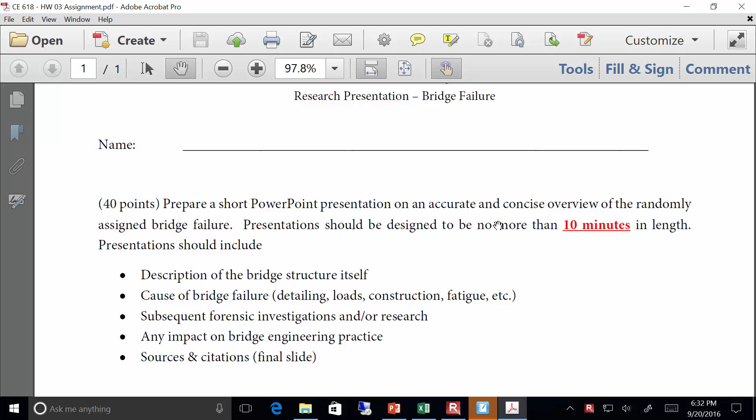If you go back to the schedule, the week before Thanksgiving break I'm not actually going to be lecturing, you all are. Let me zoom into this and pass out hard copies. Now these are for the bridge engineering folks in the room, not the senior design folks. They just get to be spectators for this, because they have plenty of presentations of their own this semester, believe me. All right, so here's how this is going to work.

I wanted to give you all the chance to do a little research on your own and do a presentation on a bridge topic. So what I've decided is I want each of you to present on a particular bridge that failed or collapsed. Tell us why, tell us where it is, what happened, what was the impact on the industry, and so on.

So you're going to prepare a short PowerPoint presentation. I've got 12 bridge engineering students here, so it'll be about 10 minutes apiece, and then I might ask a question or two, and we'll move on to the next one. We'll just keep going, and that'll be the week before Thanksgiving break.

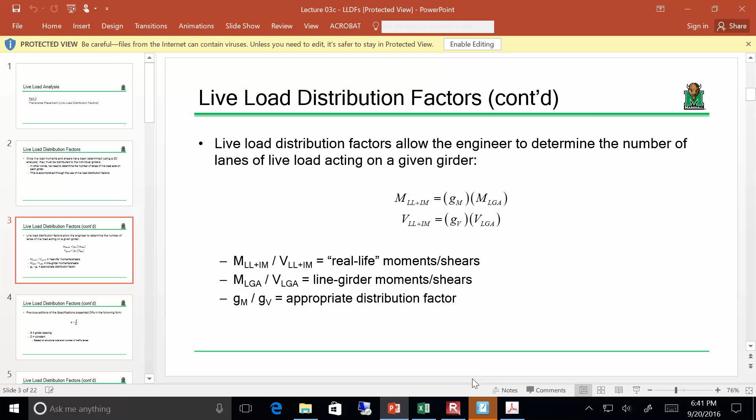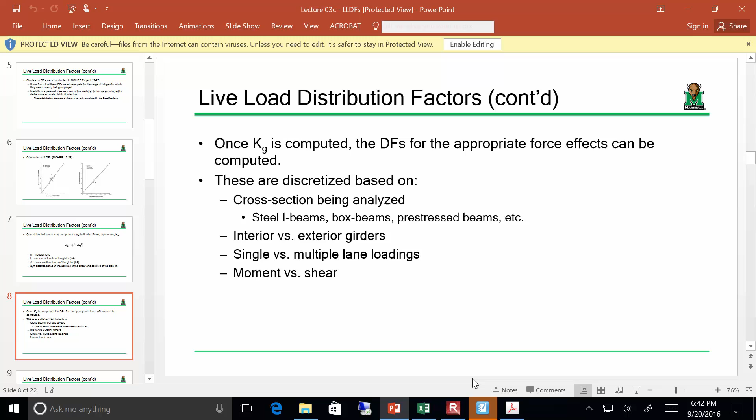So as you know, I'm not going to go into the history and whatnot because you all are pretty well versed on that. But the idea behind distribution factors is that there is a large suite of these things dependent upon the particular type of structure and force effect that you're looking at.

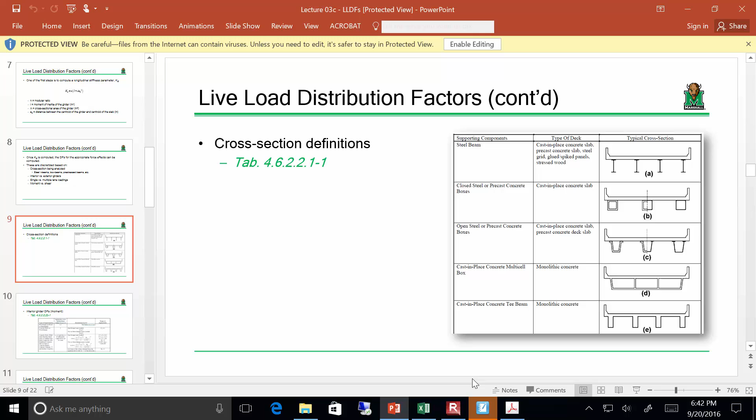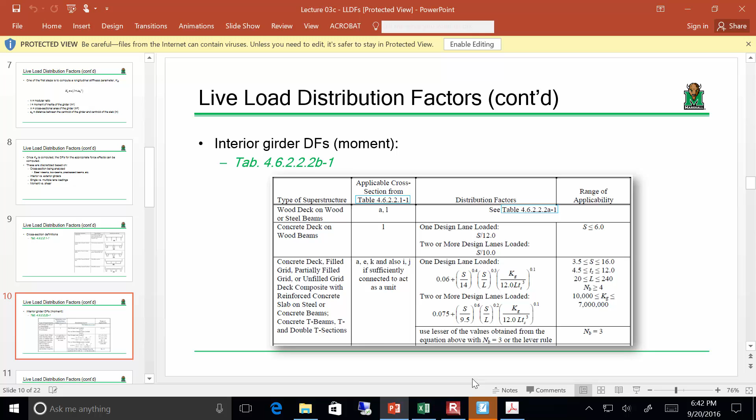So they're discretized based on whether you're looking at slab-on-beam steel bridges, whether you're looking at box bridges, reinforced concrete T-beam bridges, what have you. Based on all these given structures, you've got distribution factors for moment, distribution factors for shear, interior girder distribution, exterior girder distribution, single lane loading scenarios, multiple lane loading scenarios. You know the drill. So instead of belaboring everything going on here, let me get to the notes.

So here's our section on live load distribution. Let me blow that up a little bit.

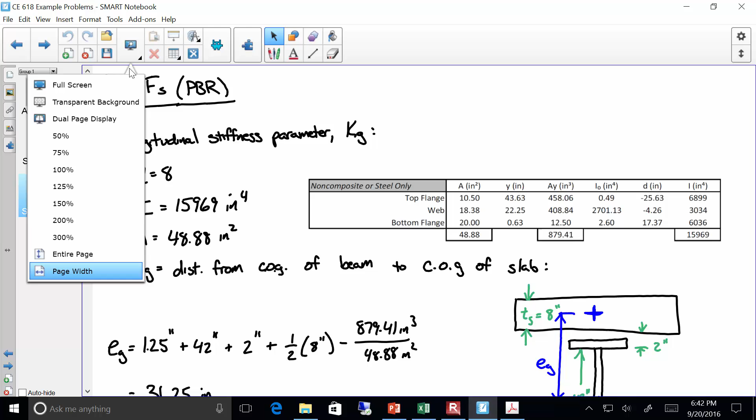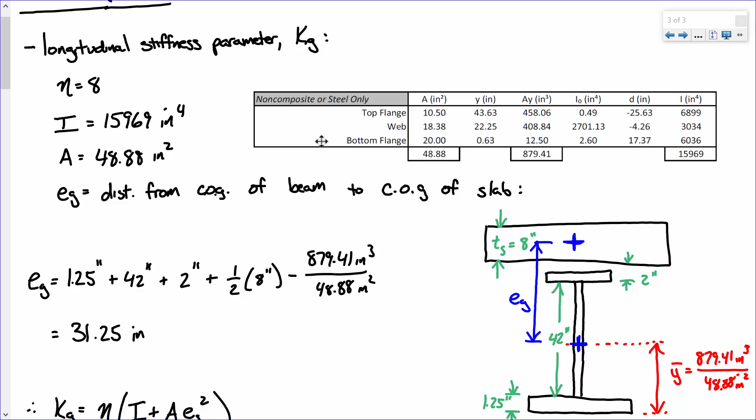So this is what we did last time, and we spent a fair amount of time going through this. We looked at how we compute the longitudinal stiffness parameter, which we get from the section properties of the non-composite section and the modular ratio. We went through and computed that, and then we were rocking and rolling with our distribution factors.

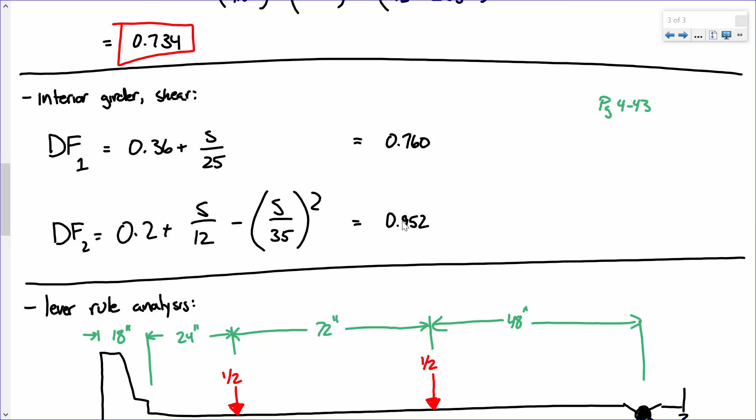We had interior girder moment taken care of, interior girder shear taken care of. We did the lever rule analysis. We've got exterior girder moment taken care of, and exterior girder shear taken care of.

And there was one large chunk of computations left, and that was special analysis, and that's where we stopped. So before I move on, does anybody have any questions about where we're at? Is everybody okay if I just pick up and keep moving?

Everybody good? Okay. Keep in mind, a lot of this you should be able to Excelify. Based on some pretty basic input, Excel can compute a lot of this for you. I'll leave you all to the organizational aspects of it, but the nice thing about Excel is that based on input, you should be able to compute any output with enough time and room on your spreadsheet.

So what I'm going to do is erase this where it says special analysis to be continued, because it's being continued right now. So, special analysis. Oh, what happened there?

Okay, so if you don't have it out, it's probably a good idea. What the heck? My pen's going in and out. Let's see. Yeah, it's running out of ink. It's a good one. Okay, all right.

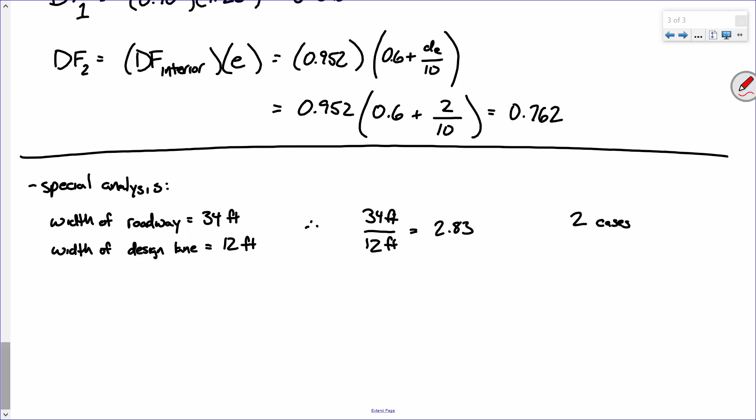How many times would we then perform special analysis? No, 2. We only put as many design lanes as will fit on the structure, so we're only putting 2. So we performed special analysis twice. Maybe I'll put 2 cases, if that makes any sense. 2 cases of special analysis.

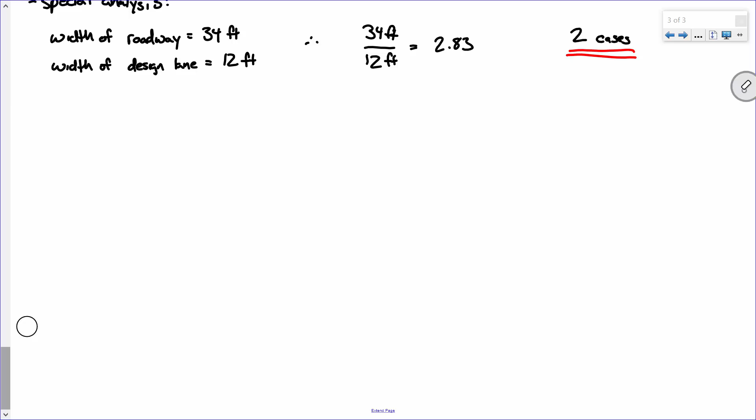My pen is not happy with me right now.

Okay, all right. So for special analysis, if you recall, we've got a number of things we need to figure out. So I'm going to start listing some parameters, and let's see what we can come up with.

To start off, we need to determine NB. My goodness. Hold on, give me 1 second.

Let me try something real quick. I was told that if my pen goes out and decides to be funky, I should unplug and plug this monitor back up. Let's see what's going on here. Okay, that made it worse. Now it's not working at all. Oh, don't tell me. No, it's not that. It's the hardware. Although we have had to do that before.

Oh, there we go. Okay, for some reason I feel like it's working a little better. Okay, NB. So NB is simply the number of beams, which equals what? 4. There's 4 beams on this bridge. Okay.

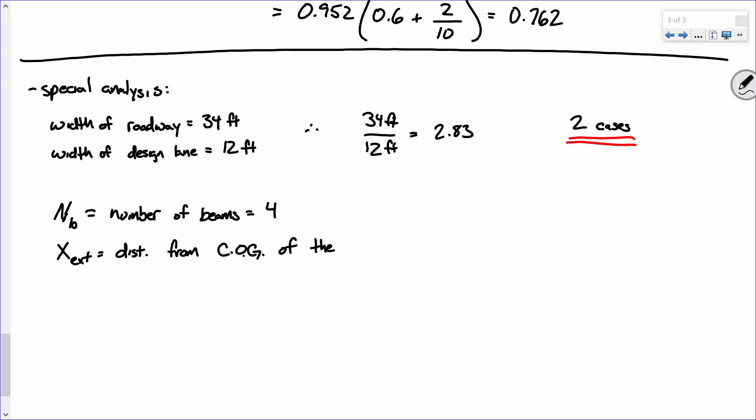All right, so next thing we need to determine is this exterior distance x. What that is, is the distance from the center of gravity of the pattern of girders to the exterior girder.

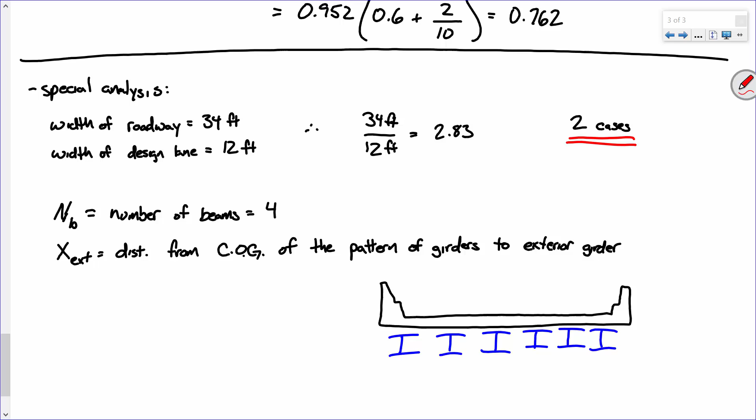In other words, if I have a bridge that looks something like this, and I have, say, a whole bunch of beams—1, 2, 3, 4, 5, 6 beams—this exterior distance is the distance from the center of gravity of the pattern of girders to the exterior-most girder. So that would be x-ext. So help me out: for our pattern of girders, what would that be? The centerline web, yes, centerline web.

15.7. Think about this bridge. How many beams are there? 4. And how far are they spaced apart? 10 feet. So think about outside to outside, that would be 30. So what's from the center to the edge? 15. Make sense?

15 feet. Not too bad, right? That's simple.

Now this next part I'm going to call the x distances. The closest analogy I can think of is we're going to find an effective moment of inertia of all of the girders. Here's how this is going to work.

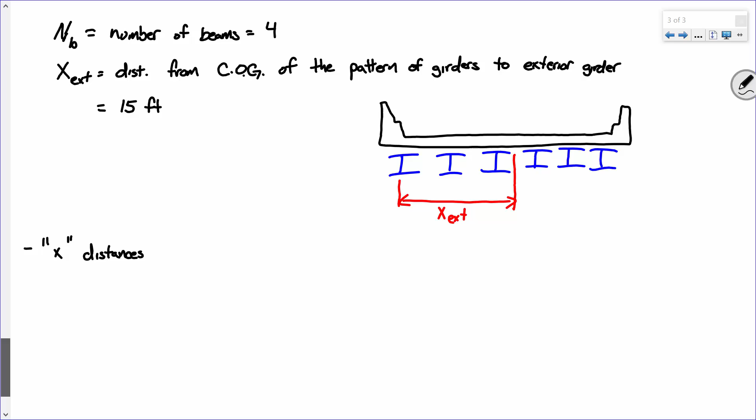How many girders do I have? 4? Okay, so let's draw a little table. Girder 1, 2, 3, 4. Now what we're going to do is this.

Let me draw a little picture to illustrate what's going on. So I've got girders 1, 2, 3, 4. Now I'm going to measure all of these distances from the center of gravity of these girders, which is essentially right here. So this is x bar. Make sense?

Everybody good with this? Let me ask you a question. How far is it? Let's go through and number these. We'll say this is girder 1, this is girder 2, this is girder 3, and this is girder 4. How far is it from the center of gravity, that centroid, to girder 1, to the centerline of girder 1?

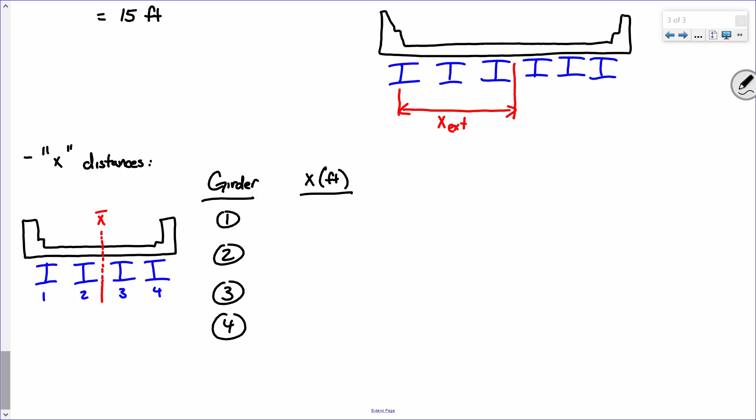15. He said minus 15. I'm going to go ahead and put minus 15, but it's not going to matter, because ultimately what we're going to do is calculate x squared. So negative times a negative is a positive, just as positive times positive. So help me out.

From the centerline to girder 2, what is it? 5 or -5, it doesn't really matter. And then what do we have? Girder 3 is 5 and then 15. Make sense? So maybe we got -5, 5, 15.

So 15 times 15, that's 225. So this is 25, 25, 225. Sum those up, what do you get? You get 500, right? So I propose that the sum over the number of beams of x squared is 500 square feet. That's not too bad, right?

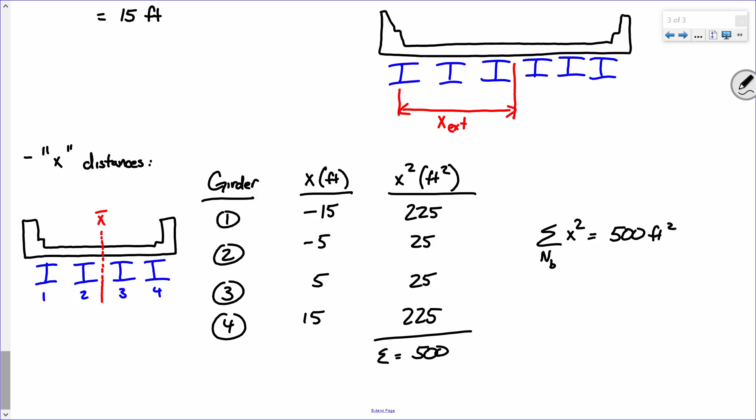Everybody okay with this? I just want to go back to the PowerPoint real quick just so everybody's aware of what we're doing.

Here's the formula for special analysis. We've already got the number of beams, we've already got this centroidal distance to that exterior girder, we've already got this denominator. So this isn't that bad, okay? I know it looks like a really funky formula, but it's pretty simple. Again, kind of the same thing as trying to determine reactions on pile groups. Basically the same idea.

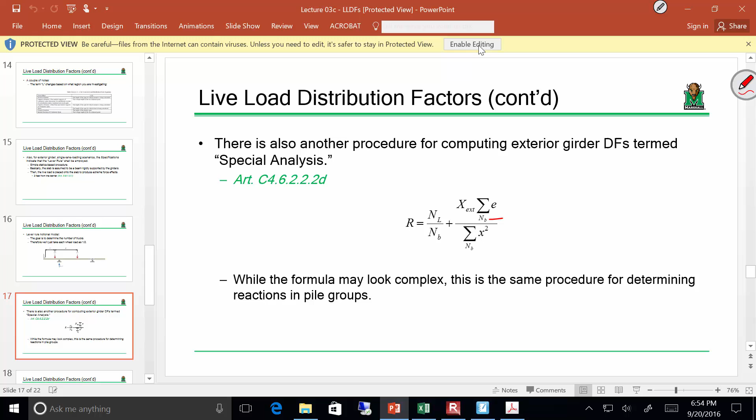So the next thing we've got to deal with is this number of lanes and then this centroidal distance. I actually just noticed I have a mistake. I'm sorry, this is right here. Let me enable editing so that you all see what I'm talking about.

This right here, that's supposed to be NL. Apologies for that. This is on the live load distribution factor slide, and it's on slide 17, so that's probably third one from the end. That's supposed to be NL. I apologize about that. That actually is somewhat important because it clarifies what I'm about to mention now.

Did everybody find that? I'm sorry about that. Okay.

Here was the point I was making, so this is why this is valid. The number of beams doesn't change each time you do structural analysis, it's still 4 beams. This external center of gravity distance doesn't change, it's still 15 feet. This dimension, or this quantity, doesn't change either - that's essentially a moment of inertia of the girders, an effective one, if you will. That's going to be 500 square feet. What is going to change is the number of lanes and then this eccentricity distance.

So to give you an idea, when we do special analysis for the first case, we're going to assume 1 lane loaded, so this is going to be 1. When we do it for the second case, we're going to assume both lanes loaded, and this is going to be 2. So if you had to do special analysis 8 times, you would do it with NL of 1, then NL of 2, NL of 3, NL of 4, NL of 5, and just keep doing it. Make sense?

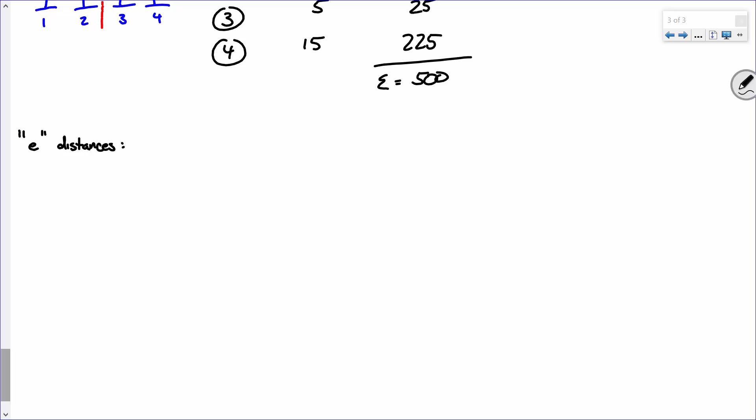Okay, all right, so let's look at our E distances. Now these E distances are basically the truck eccentricities. So I'll say it, truck eccentricities. Okay, so what do I mean by that? Okay, so let's see. So bear with me, I'm going to do my best to be artistic.

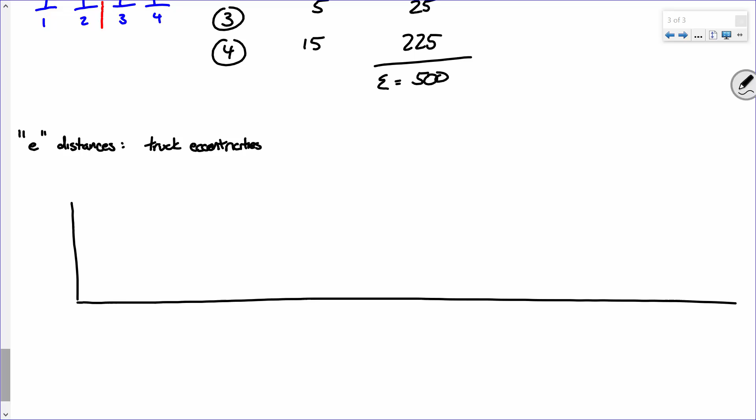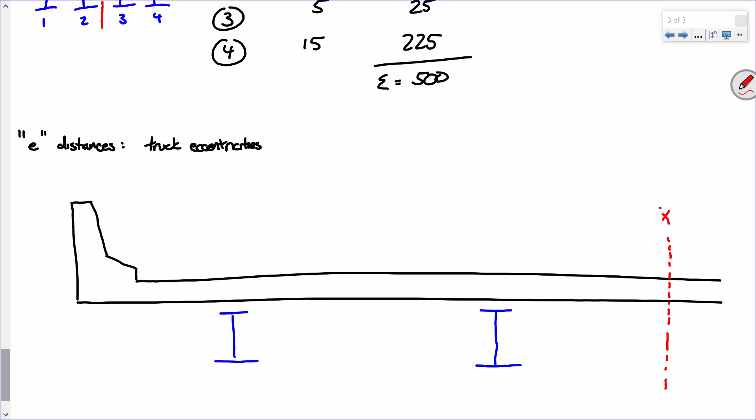Okay, so here's this. All right, so what do we got? We've got a girder that's about, I don't know, right here. We've got a girder that's about right here. And then we've got this line right here, which is what I'm going to call that X bar distance. All right, so far, so good?

Everybody good? Okay, now let's go back to what the lever rule stated. The lever rule stated that here's my edge of the barrier, right here. I go 2 foot over, right? 2 foot over, and then my truck goes there, right? Remember that? So 2 foot from the edge of that barrier. So I put one wheel right here, and then another one about right here. So this is what I'll say, this is truck 1. Make sense? And this was 0.5. This was 0.5. So far, so good?

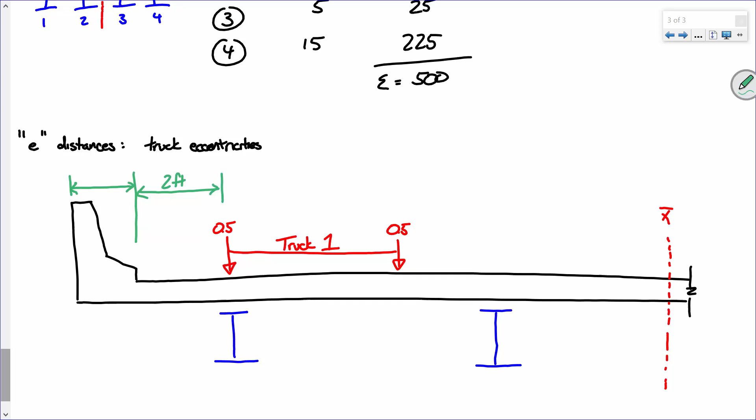All right, so let's put some dimensions on here. So this dimension here, from here to here, this was what, 2 feet? What was this dimension right here? How wide is that barrier? One foot 6 inches, so that's 1.5 feet, right? Make sense? All right, this dimension here, three foot 6, so it's actually 3.5 because that's half a foot, right? And then this is 10 feet. And then what's this dimension right here? 5 feet. Okay, so far, so good?

Now would you believe me if I said that, okay, I've got this truck right here, 0.5 and 0.5, where this dimension here — I'm going to scoot this up a little bit, bear with me — so this is 0.5, this is truck 1. And this dimension here, this is the width of the truck, right? So this is 6 feet, right? That's how wide the truck is, all right? Would you believe me if I said that the centroid of that truck is about right here, somewhere about like that? So what is this dimension? 3 feet. So far, so good?

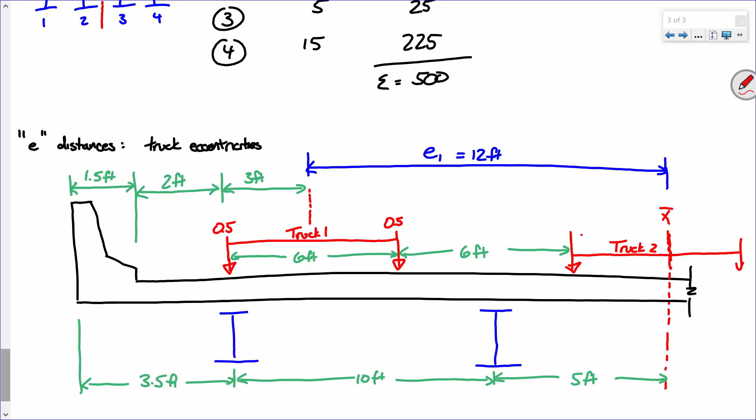All right, so this is truck 2. And it just so happens that the center of gravity of the truck and the center of gravity of the pattern of girders happens to coincide. So I propose to you that if the first eccentricity is 12 feet, the second eccentricity is 0.

Just this one, just this one. We had some very special circumstances here. Watch this, we had some very special circumstances. We had an overhang that was 3.5 feet, we had a barrier width that was 1.5 feet. So that 2-foot eccentricity put that first wheel load right there. That was just luck of the draw, okay?

And then the dimensions were such that with the width of the truck and the girder spacing, it just so happened to be right there. Not always the case, but just happened to be for this one. Does that make sense? Everybody okay with this? So is everybody okay with E sub 1 being 12 feet and E sub 2 being 0? Everybody good? Okay, all right.

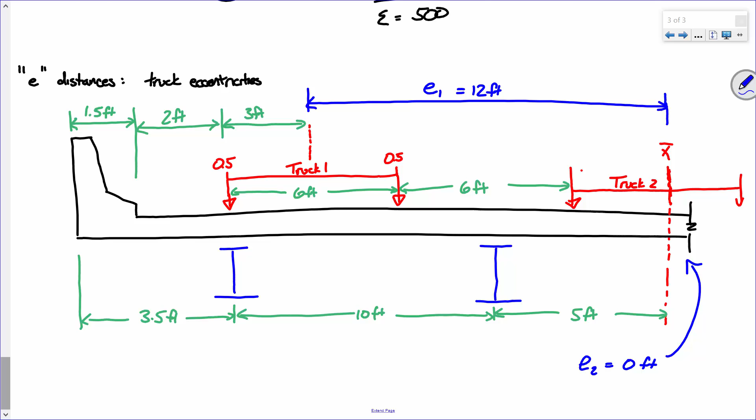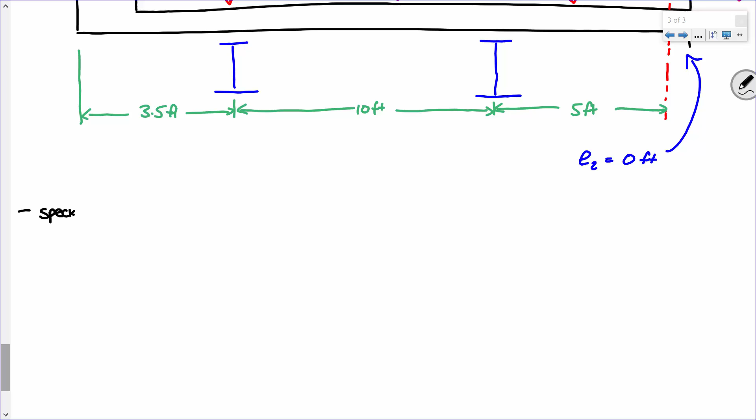So, show you how this works, it's pretty simple, all right? So I want to get myself a little bit of room. So let's finally do our special analysis. How many times are we going to do special analysis? Twice. So let's look at our first case of special analysis.

So the number of lanes is going to be 1. And then what do we know? We need to determine the sum of all of those eccentricities. Well, since we're only dealing with one truck on the bridge, it's just going to be E1, which happens to be 12 feet. If we were doing case 2, it'd be E1 plus E2. If we had to do special analysis 4 times, we'd do E1, E1 plus E2, E1 plus E2 plus E3, and then E1 plus E2 plus E3 plus E4. We just keep cumulatively adding up those trucks. Make sense? Everybody okay with that?

So I propose then that special analysis for one lane is going to equal the number of lanes divided by the number of beams, plus X external times the sum of all my eccentricities divided by the sum of my X squared. So that is 1 over 4 plus what? What is that? 15 feet times 12 feet over 500 square feet. And that comes out to be what?

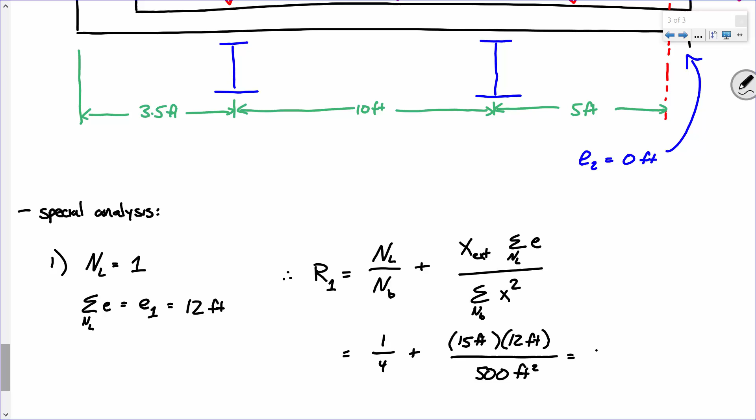.61. Now, is that my distribution factor? The answer is no. Because if you recall, remember those whole multiple presence factors? Remember when we did the lever rule, we had to take the lever rule and adjust it by that multi-presence factor? Because multi-presence factors, they're built into all those nice, pretty plug-and-chug equations, but they're not built into methods like this. So we have to go out of our way to incorporate it.

So let's see if you all remember. What's the multi-presence factor for one lane loaded? We used it for the lever rule. We took the lever rule analysis and then we multiplied it by something. What were you saying? It was 1.2 - this is a good first guess.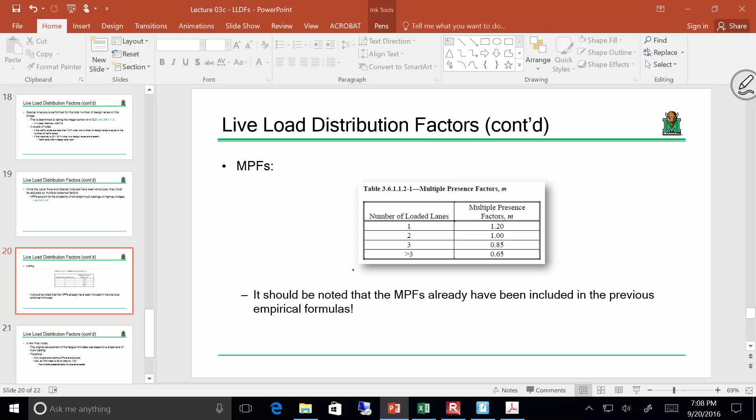Oh, wrong one. All right, so if you recall, they're right here. So multi-presence factors, they're in that section 3 of the spec. So if you've got one lane loaded scenarios, you multiply your distribution factors by 1.2. If you're dealing with 2 lane loaded scenarios, it's 1. At 3, it starts dropping down. And anything greater than 3, 4 lanes, 5 lanes, 6 lanes, you just cap it off at 0.65. All right, make sense? Everybody good?

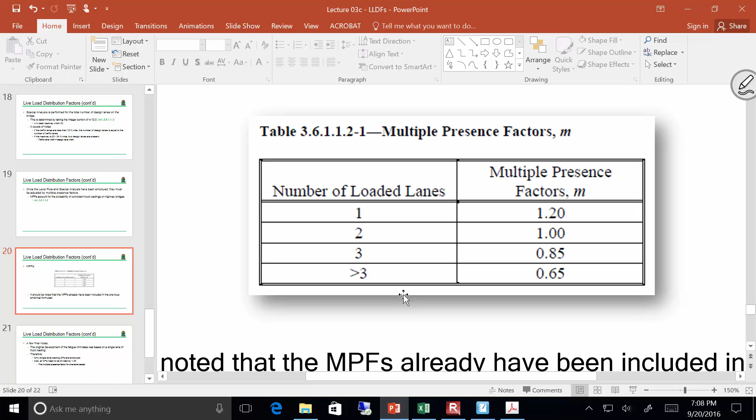Okay, so let me go back here, extend this down a little bit. So here's my reaction from special analysis, the distribution factor, which maybe I should clarify - I'll write this afterwards. Let's just go ahead and calculate the distribution factor. It's 1.2 times 0.61, and that is what?

0.73, and we'll say 732. Okay, let's clarify what this is for. This is for exterior girders.

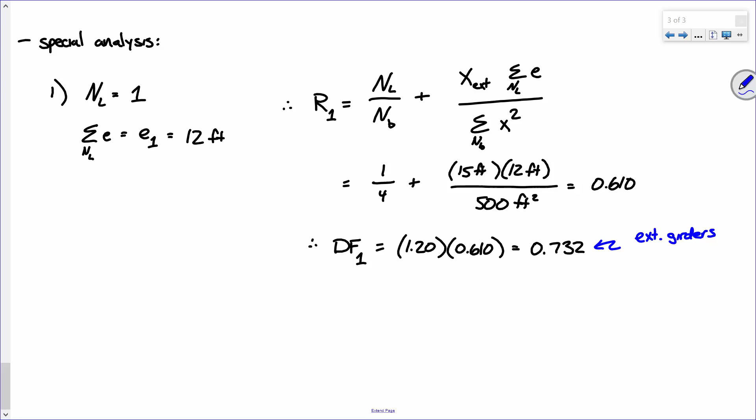This is for moment and shear. And it's for how many lanes loaded? One. It's just a one lane loaded scenario because it's a special analysis considering only one truck. So one lane loaded.

Okay, so that's case 1. Any questions?

Now let's do it again for case 2. What do we have? We have two lanes loaded in this case. We have the sum of all of our eccentricities being E1 plus E2, which just so happens to be 12 feet as well.

So in this case, I propose that R2 would then be 2 over 4, plus 15 feet times 12 feet, divided by 500 foot squared. And that comes out to be, this comes out to be 1.1?

I got 0.86. Yeah, because the difference between the first one and the second one is we're only adding a quarter. So if you take that first one and add 0.25, that's what you should get.

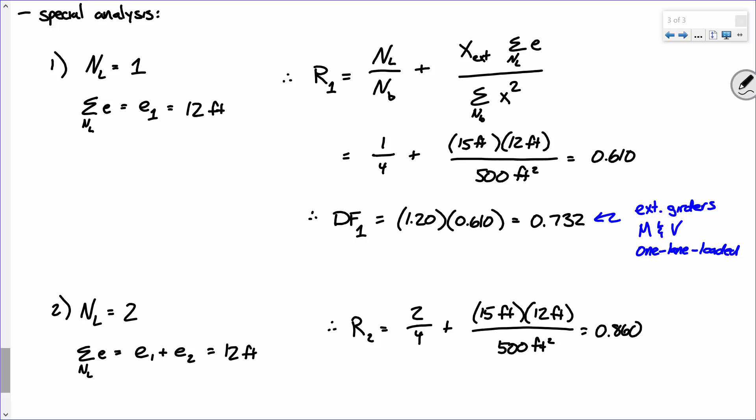Sound good? All right, now, is that our distribution factor? Well, we take our distribution factor - or I'm getting ahead of myself - we compute our distribution factor by taking this and multiplying it times the appropriate multi-presence factor.

What is the appropriate multi-presence factor? 1. So in this case, it comes out to be 0.86. Make sense? Any questions?

Now, from a design standpoint, let's sort of summarize. So we've got this massive list of distribution factors, right? This is what I like to do in terms of design.

I don't really think it's worth it in most cases to design the girders independently. In other words, let's just pick the worst case distribution factor from interior girders and exterior girders, and let's just design them all the same. So let's do this, okay?

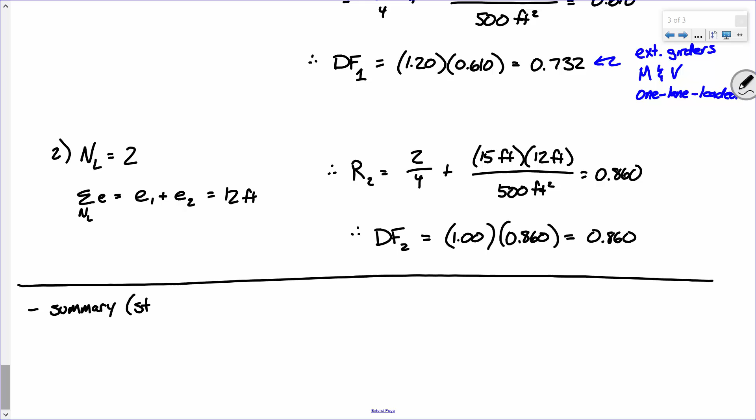I'll say summary. Now, I'm going to say summary, but I'm going to indicate that this is only for strength and service limit states.

Because when we do fatigue limit states, we have to handle it a little differently. It's not complicated, but it's pretty straightforward. So help me out, all right? The distribution factor for moment and the distribution factor for shear.

Now, you all go through your notes and scroll up, and you tell me what was the absolute largest, worst case moment distribution factor that we computed out of everything that we did.

.8, okay, so we've got 0.86. Is there anything higher? Okay, now, okay, all right, 0.952, what was that for? That's for shear, okay?

What's that? That, okay, the shear one. That's what he's talking about. Yeah, that, okay, and I'll go ahead and tell you, that is the largest one that we computed for shear. And it was what, interior girder, like two lanes loaded? Is that what it was?

Interior girder. So we can say, let's go ahead and indicate that - interior girder, you know, I'll say multiple lane loading because it's two or more.

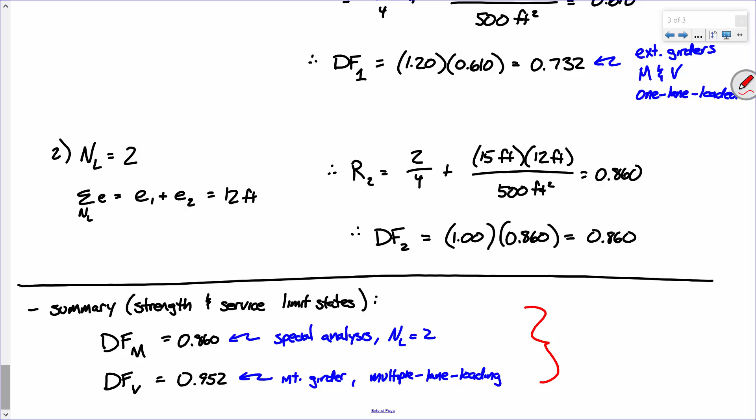Everything that we've computed, or at least most of what we computed - actually, no, it's not even most, it's a very small amount. But let me say this: all I can state definitively is that these are the governing distribution factors for the positive bending region.

Okay? Why can I only state that, why can I only make that claim for positive bending? Because earlier, what was the very first thing that we computed? Very first thing in all of this.

kg, we computed this. Let me scroll up.

We did a lot. Remember, the first thing that we computed was this term kg. We used kg in some of our distribution factors. So, because of that, we've got to go back and compute the negative bending distribution factors that are appropriate.

Now, don't relax. We're not going to go back and do every single distribution factor all over again. For instance, let's take the lever rule. Does the lever rule really change whether or not you're in the positive or negative bending region? No. The only difference is the girder size is a little different, a little bit of a thicker flange. That doesn't change the girder spacing or anything like that.

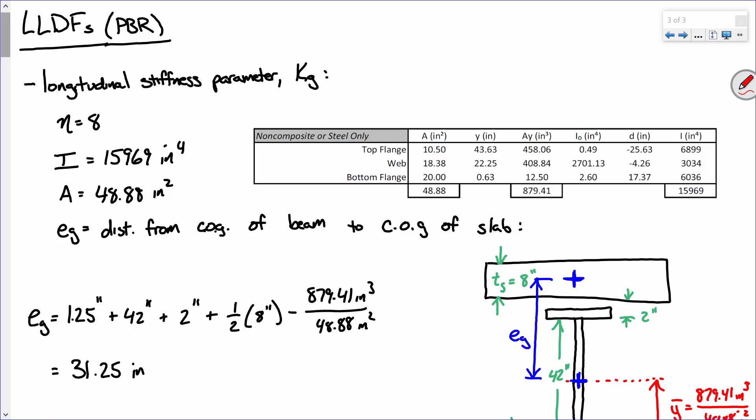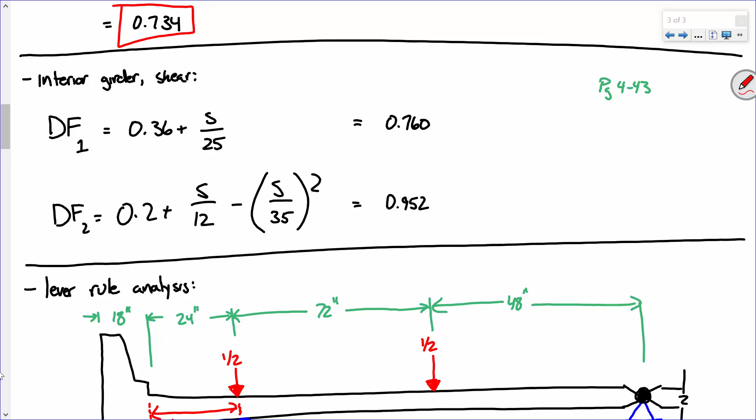So we don't have to go through and do the lever rule again. We don't have to go through and do special analysis again. We actually don't even need to go through and compute any of our shear distribution factors. If you scroll down, let's look at the shear distribution factors. For the interior girder, they were only a function of girder spacing, right? And for the exterior girder, they either came from the lever rule, special analysis, or from this modification factor.

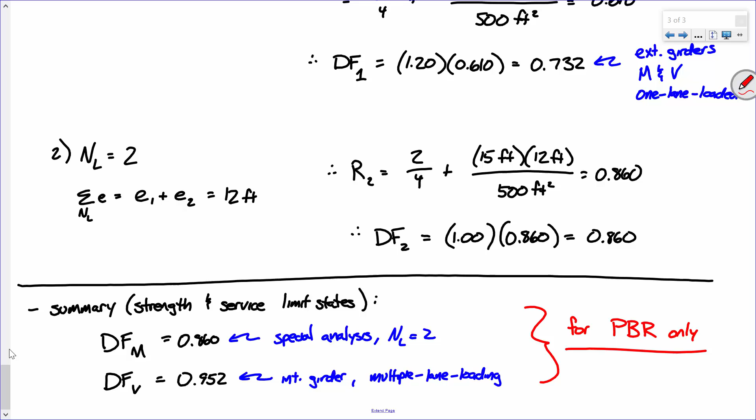And that's just a distance from the exterior girder to that curb. So I propose that this shear distribution factor, right off the bat, I know that's going to work across the board, the 0.952. I propose that's going to work across the board. Sound good? Okay, so all we got to do is moment. So let me extend this out a little bit.

So let's go look at negative bending. Okay, so let's look at our longitudinal stiffness parameter, kg. We're going to need a few things. We're going to need our modular ratio, which what's that? 8. That doesn't change. We're going to need I. We're going to need A. We're going to need EG.

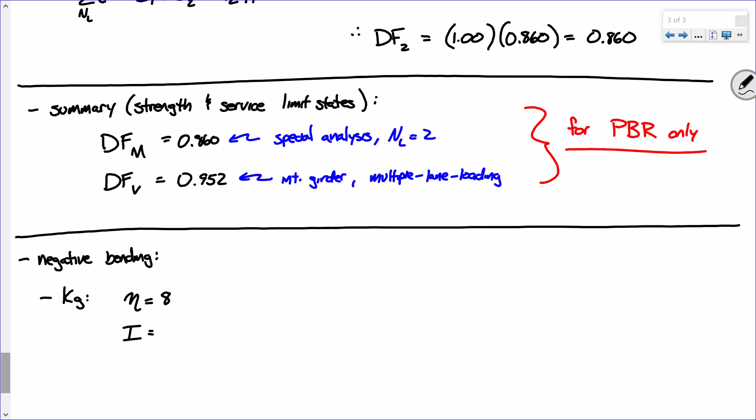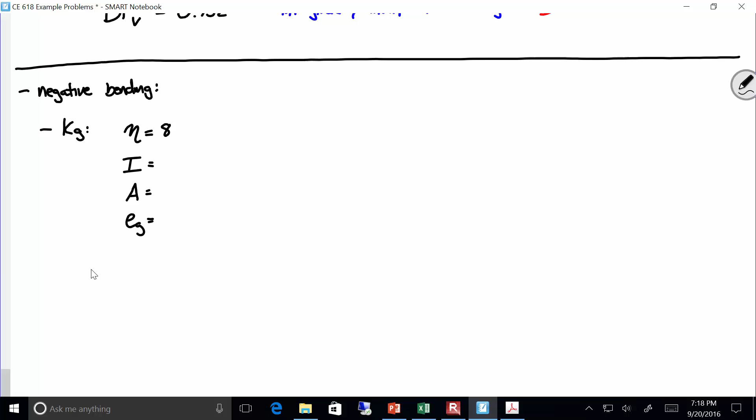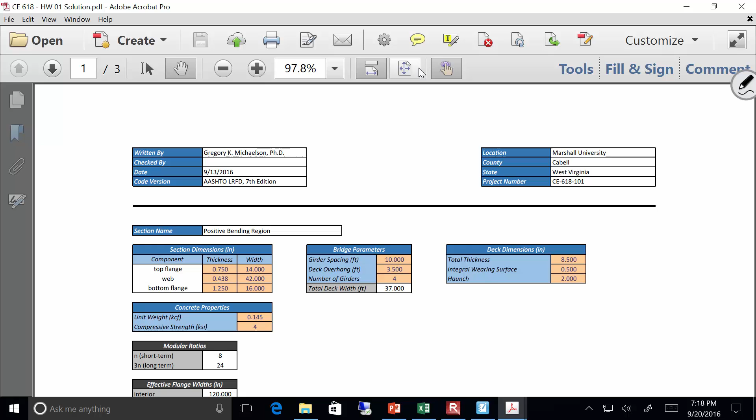So let me go back to my folder. Let's go back to my notes. Section properties. Let's go here, and let's look at our negative bending region. So here's my spreadsheet with the negative bending region properties on it, and we're interested in this one right here. So let me screen capture this.

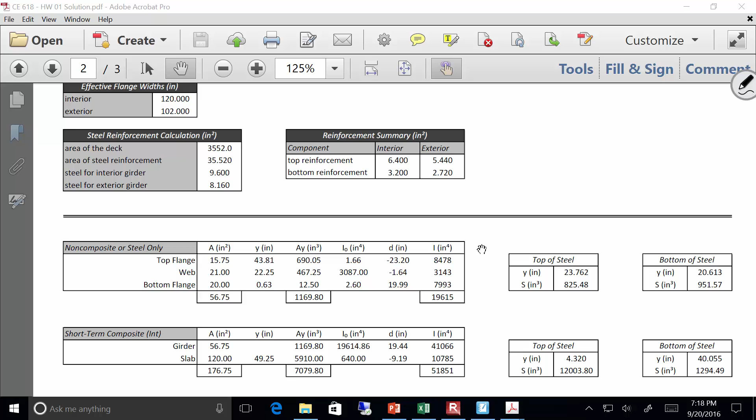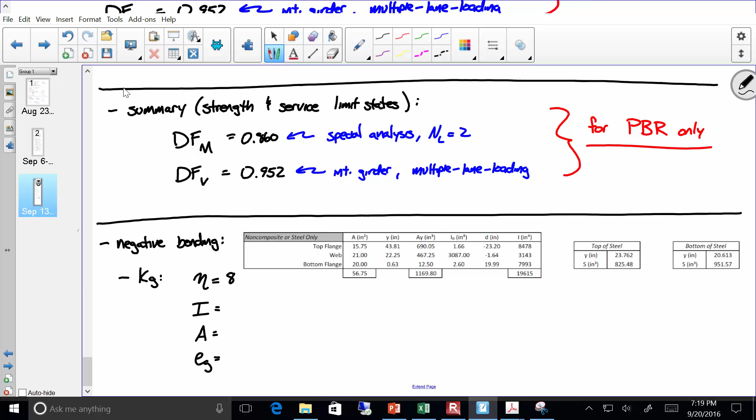Oh, there we go. Make that a little smaller. I think that's good enough. Okay, so these are the section properties from the negative bending region. If you can't read that, I'll go ahead and fill this in. So the moment of inertia was 19,615 inches to the fourth, and the area was 56.75 inches squared.

Okay, all right. Now EG, let's see if y'all remember that. Remember, EG was the distance from the center of the beam to the center of the slab. Okay, so let's get to the center of the slab first. Okay, so let's see if we remember this.

Okay, so we start at the bottom, go bottom flange thickness, right? Web depth, haunch, half the slab thickness, and then we subtract the centroid, right? So help me out with the dimensions. Make sure y'all paying attention. What's the bottom flange thickness?

In that negative bending region, remember, right there around the pier, that middle support on that beam. 1.25 inches, so 1.25 inches. All right, plus the web depth, which is 42 inches, plus the haunch, which is 2 inches, plus the slab thickness, which is half of what? 8. Not 8.5, 8. Because remember, we're using that structural slab thickness.

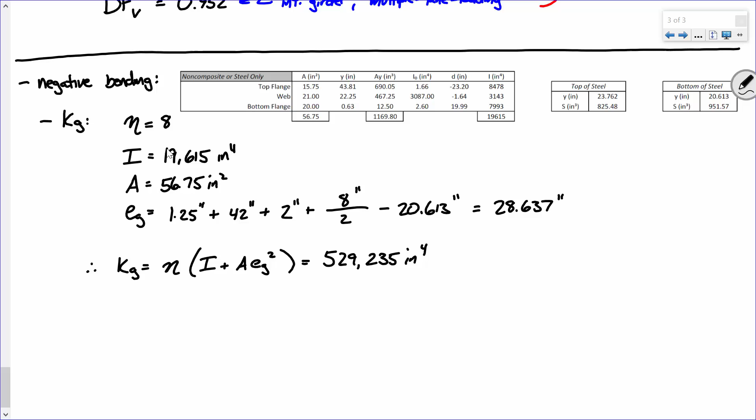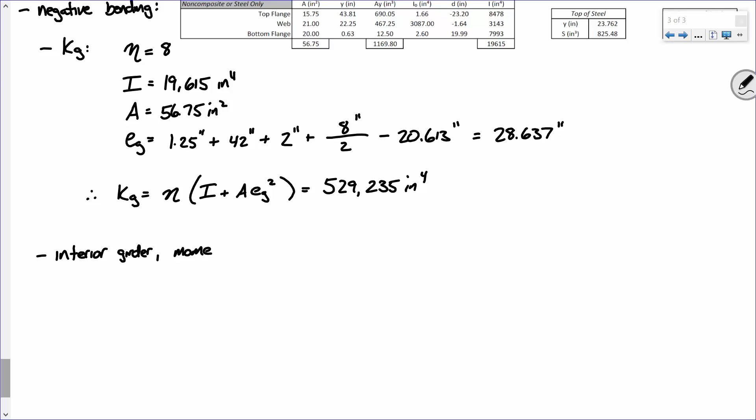So what are those 3? We have the interior girder moment ones. Now let's see if we can remember these.

Let's recall that S is 10 feet, L is 90 feet, the span length, and TS is 8 inches. All right, let's see how my memory works. We have the 1 lane loaded.

And then we have the 2 lane loaded. Did I get that right? Did I get that one right? I think that's right.

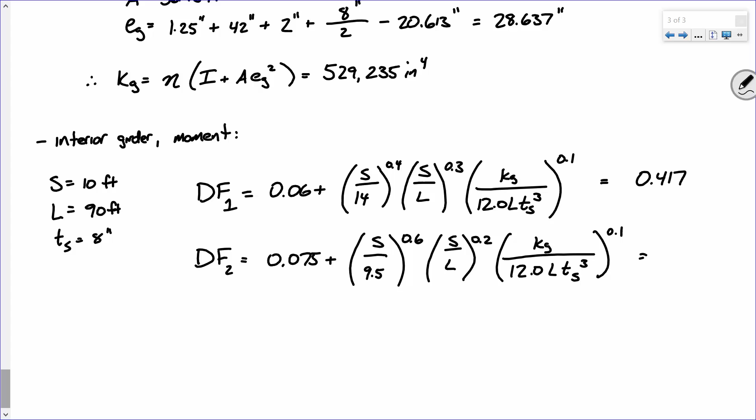Nobody's laughing. Goodness, you're a tough crowd. .417, and this. Well, hold on, let me see something.

All right, the first one, what do we get for the first one? Okay, we got, oh goodness. When we did this the first time, we got .508. And the only thing that changed is this number got slightly larger, so the number shouldn't have gone down.

So the numbers should be probably... Okay, but the same thing. When we did it last time, we got .508. And the only difference between this and what we did before is this number went up. Is there an exponent? Like, check your exponents. This would be 0.4, 0.3, and 0.1.

Okay. That seems a little high. 510. That actually sounds pretty good. Is anybody else getting 0.510? You didn't bring a calculator, did you?

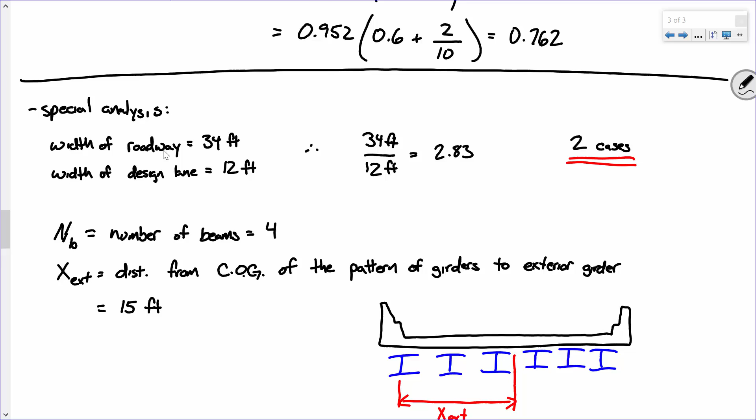Oh, do the second one. Okay, 0.510, that sounds right, because look at the numbers. Like if I took this one and just slightly increased it, it's going to only slightly bump that up a little bit. So 0.51. The next one, I'm guessing like 0.74 or something.

0.737. Is anybody else getting that? I know these are involved. They're not hard, it's just a lot of plug and chug. Anybody else? What you got? You got?

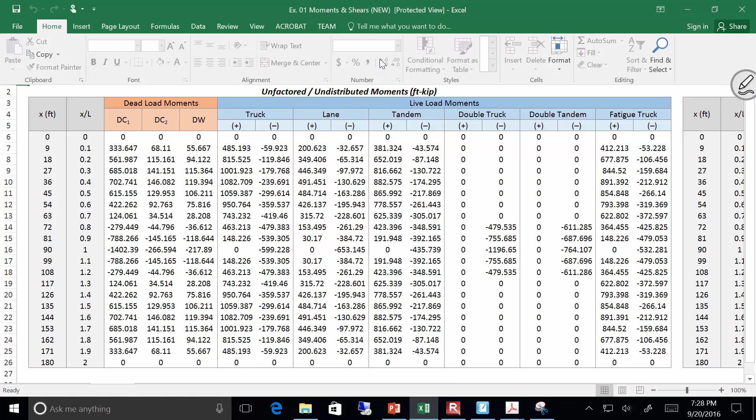Hold on, we'll do it together real quick. Let me throw it on Excel. So, all right. So, we'll look at that later. All right, so...

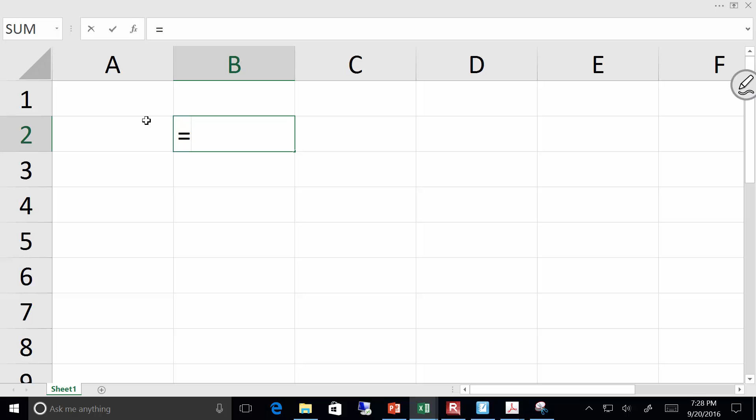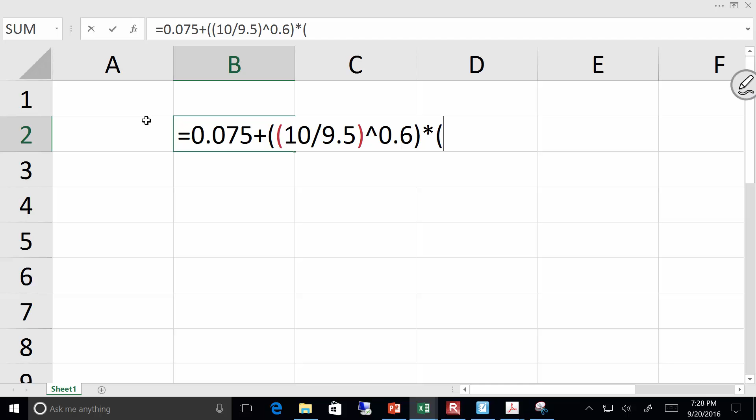What do we have? We have, let's do that second one: 0.075 plus 10 divided by 9.5, raised to the 0.6, times 10 divided by 90. Oh, I was working on it. Let's do that. All right, that is raised to the 0.2, and then multiply another big thing raised to the 0.1, and that is the KG.

What was KG again? 529,235 divided by a quantity, and that quantity was 12 times L, which is 90, times 8 cubed, right? Again, I just sort of go crazy with the parentheses just to be sure. Oh. So let me hit enter.

And that's what I'm getting, 0.737. All right, and you see the formula up there. Is everybody okay with that? Everybody okay with that? All right, so make sure you're clear on how to do that stuff.

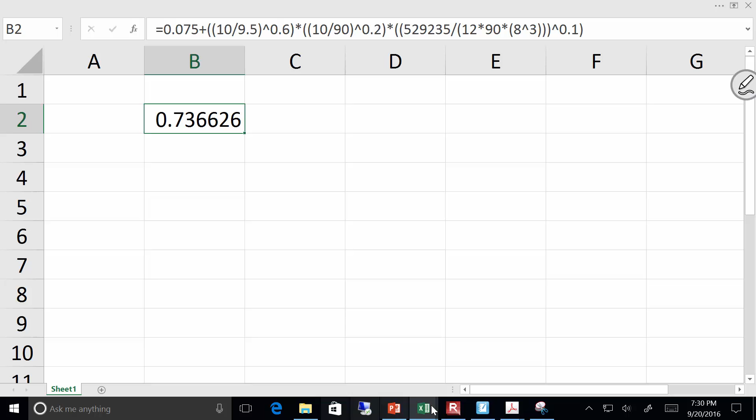Okay, the only other one that we have to do is exterior girder moment. No, sorry, exterior — interior girder — wait, no. We need to do exterior girder moment, 2 lanes or multiple lanes loaded. Sorry, I'm in need of coffee is what it is.

Okay, so if you recall, this is where we take that distribution factor for the exterior girder, and the way we compute it is we take the distribution factor for the interior girder and modify it by that value E. Remember that? Everybody remember that? So what was E for moment? It's going to be like way up here. Remember this? That 0.77 plus DE over 9.1.

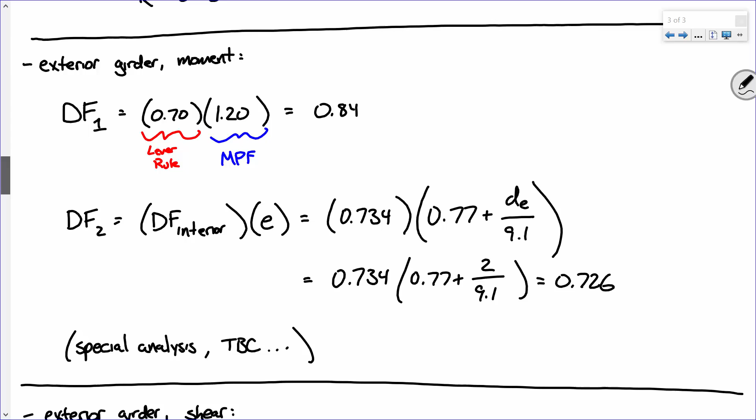Remember that? And DE was measured to be 2 feet from the exterior girder to the curb. So I take the worst case scenario, which is 0.737. I then multiply it by 0.77 plus DE over 9.1, which is 0.737 times 0.77 plus 2 over 9.1, which is what?

Zero point seven... 729. 0.729. Okay.

Now, unfortunately, you're going to be mad at me because this was actually a pointless exercise, since all of these distribution factors are for moment: 0.51, 0.737, 0.729, all for moment. But none of them are bigger than this 0.84.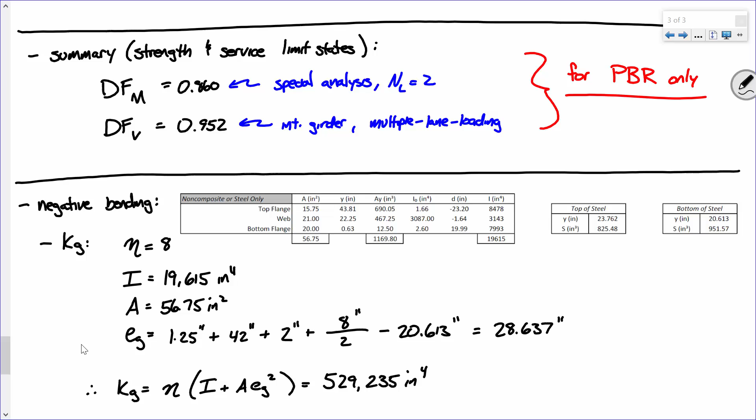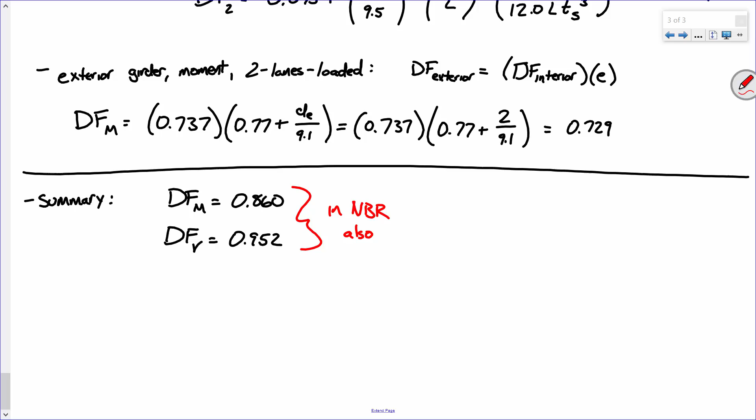So I propose that as a summary, the distribution factor for moment is again 0.860, and the distribution factor for shear is 0.952. And these also work in negative bending regions. Also, again, this is only for strength and service limit states.

Okay? We're going to do the fatigue distribution factors now, although we're not going to use them, but they're very simple. All right, everybody good? Okay, so fatigue. Here's how fatigue works. When you do a fatigue limit state assessment, you are doing it based on a single truck, just one truck, okay?

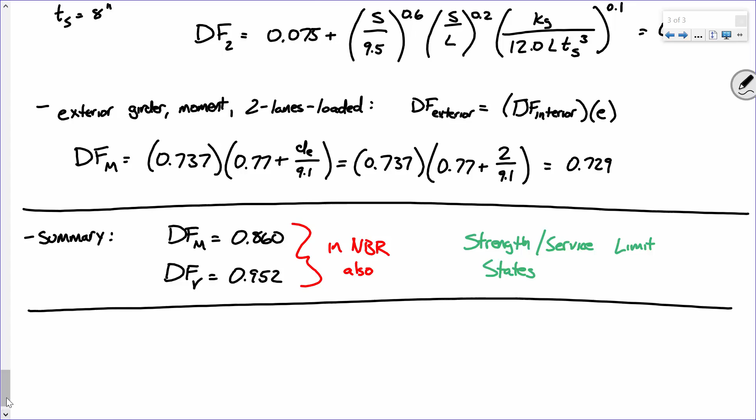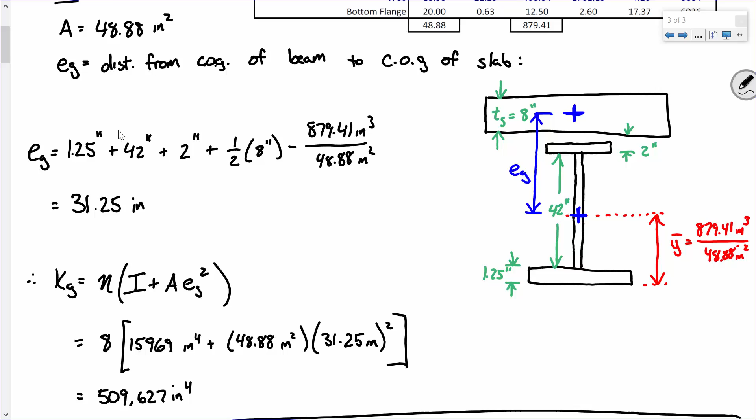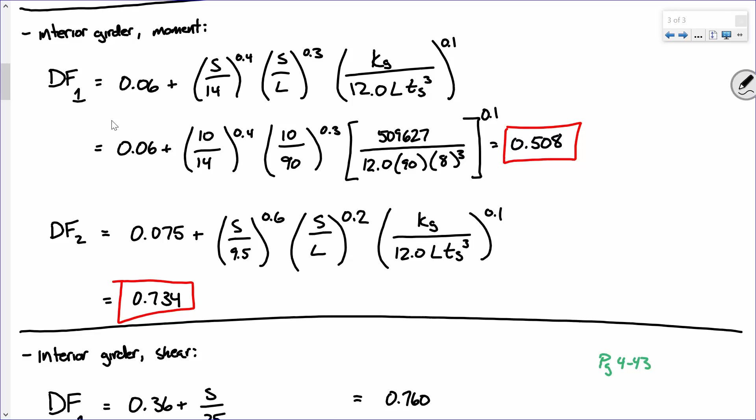So the first thing we're going to do is moment. Let's go through and pick out the largest moment distribution factor, but one lane loaded. Let's scroll up to the very beginning. So what do I have? Let's think, moment, one lane loaded. So interior girder moment, I got 0.508, right? I'm not looking at the next one because that's multiple lanes loaded. So 0.508, we're looking at moment.

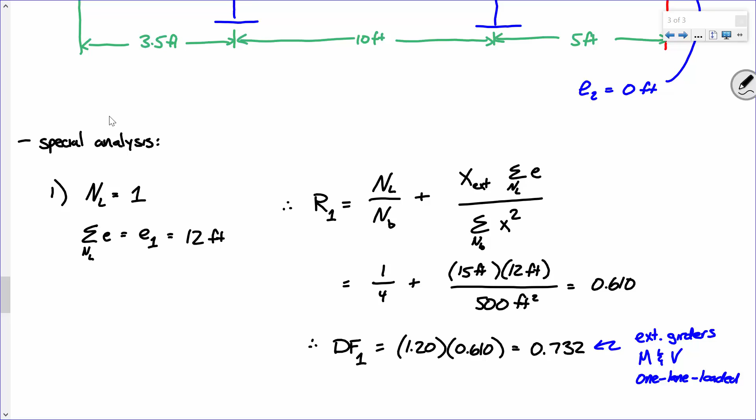0.84, right? Distribution factor, exterior girder, one lane loaded. Special analysis, what was that, 0.732, right? And that's probably it, right? 0.51. So the largest one we got was 0.84, right? That's the largest one for one lane loaded.

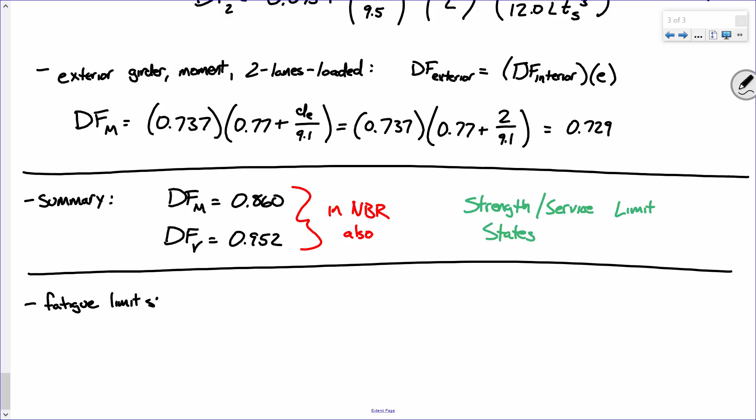I propose that for the fatigue limit state, if you want, you can say a fatigue distribution factor for moment is the largest one lane loaded regular distribution factor divided by 1.2. And why am I dividing it by 1.2? Because I've got to take out that effect of multiple presence. We're only looking at a single truck, okay? So for distribution factors for moment, the largest one we got was 0.84. Take that, 0.840, divide by 1.2, and that comes out to be what?

0.7. 0.7. All right. For shear, same deal. The fatigue distribution factor for shear is the largest one lane loaded distribution factor for shear divided by 1.2. So it's some value divided by 1.2.

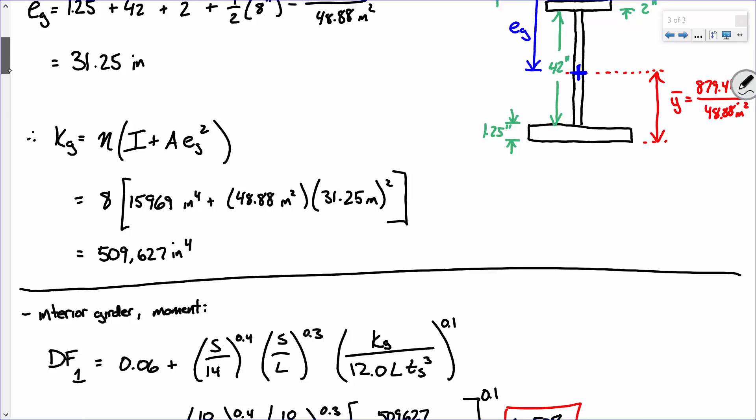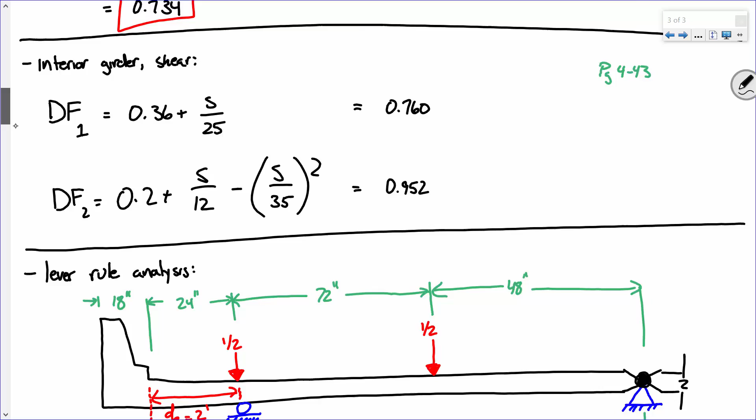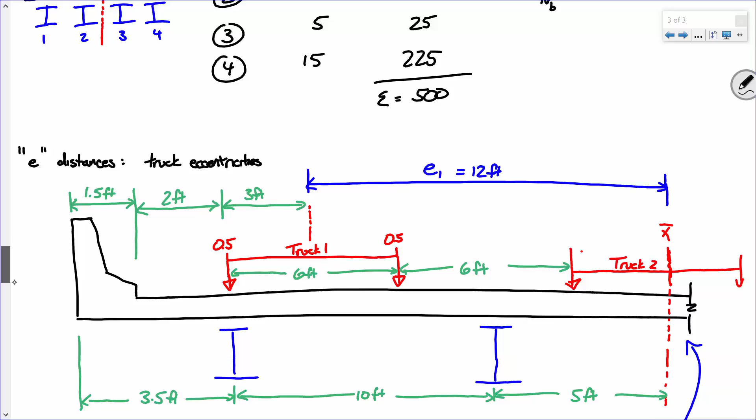What is that? Okay, let's do the same thing. Start at the very top. Let's see if I missed something. So moment, shear, what did we get? 0.76. .84, probably 0.84. There we go, 0.84. So why did they happen to be the same? Because that largest factor came from the lever rule.

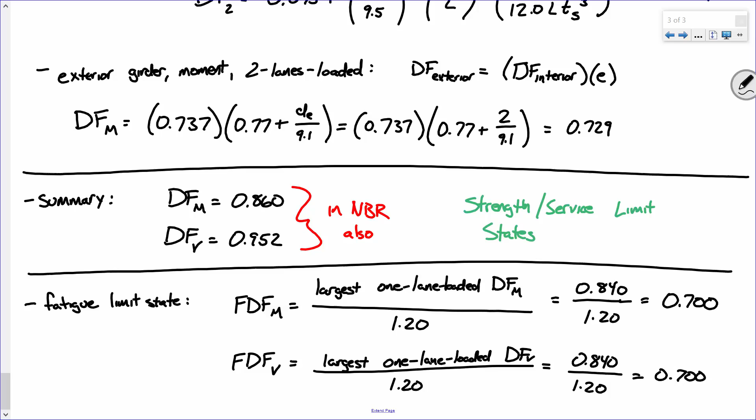So far, so good? I got one last calc and we'll take a break, all right? One last calc. We've done distribution factors for moments. We've done distribution factors for shears. What about distribution factors for deflections? It's very simple.

This is specifically for live load deflections, the live load deflection distribution factor. Okay, let's do this. What's the maximum number of lanes? 2. Okay? And for 2 lanes, what's the appropriate multi-presence factor? 1. Okay? What is the number of beams? 4. I propose that we assume for live load deflections that everything deflects equally, so we just take 1 times 2 trucks over 4 girders.

And that's it. Everybody good? It's not too bad, right? There's no super duper fancy formula for live load deflections because it's not a prescriptive check. It's an optional live load deflection check, so that's basically it. Any questions?